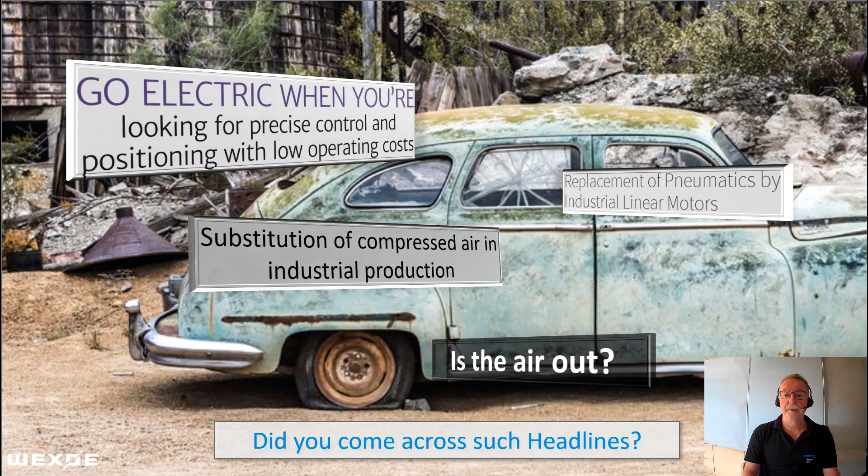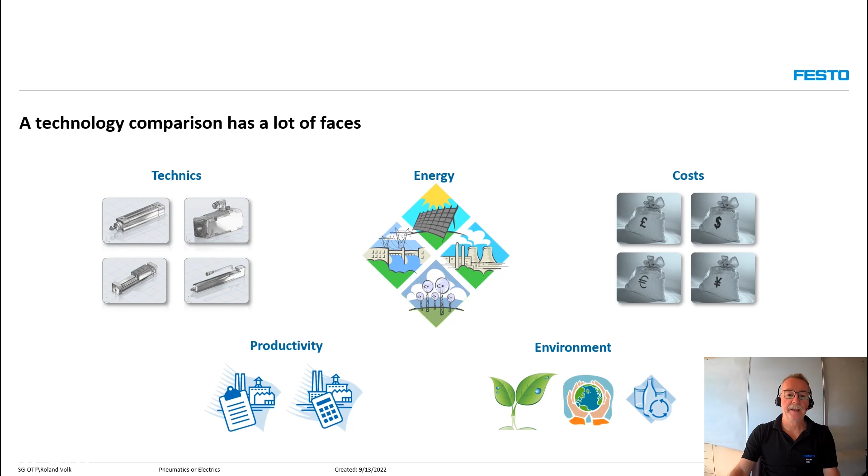Headlines like this, I think you all have seen in the daily newspapers. But what is the truth? Is it really true that the air is out? And if you want to have more efficient systems, you have to replace pneumatics by industrial linear motors? We will see. A technology comparison has a lot of faces. But mostly, if you see in the daily newspapers, the focus is on the energy consumption. Only a few take a look at the costs, especially the investment costs, and also the techniques, the productivity and the environment.

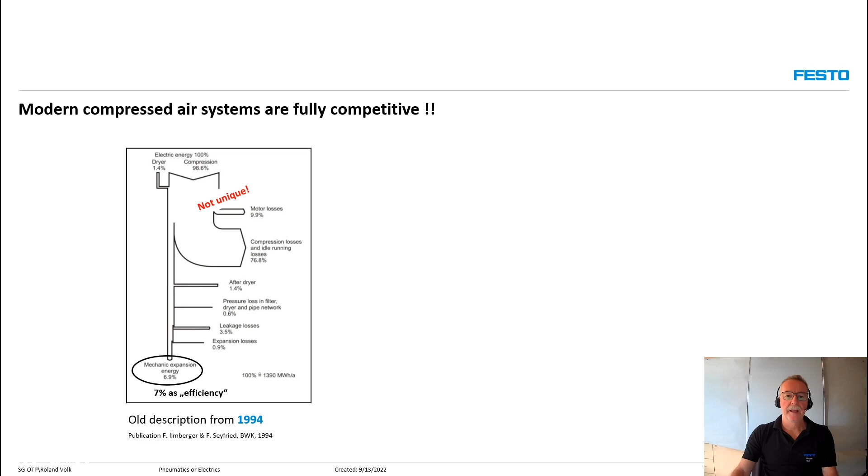First of all, I will give you some information about compressor systems, because this is the energy for pneumatics, so we have to take care of the generation of compressed air. And I think a lot of you have this energy diagram on the left side here in mind. This means 100% of electrical energy you put in a compressor, and at the end, we have 7% left directly on the machine. This was valid for a long time. This was created in 1994, but it's a wrong argument here. And we know since around 10 years that a compressor is much more efficient than we see on this diagram.

Here, a modern system with a 64 kilowatt compressor, 100% in. We have our losses in the compression, in the preparation, and so on. But at the end, we have around 42% remaining on the machine. This is partly theoretical. In most cases, the degree of efficiency of a compressed air system is around 20 to 25%.

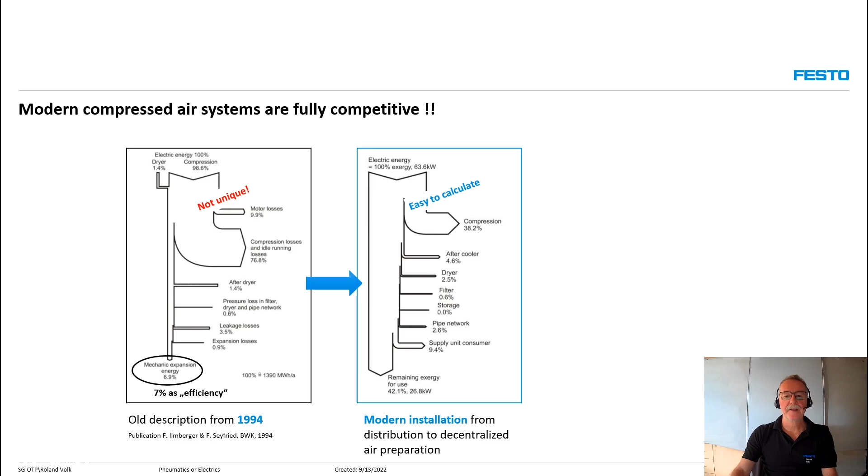I have a lot of discussions with our customers about the technologies, and they ask me mostly, what is the better way? What is the most efficient way? So my answer is the application is the key, and we tried to figure out some key questions to choose which is the best technology for the application. And you see here these 5 questions.

So, do we need a free and flexible position? Are there long strokes with high speed and short cycle times required on the machine? Do we need more than 3 positions in our application? Or does the drive have more tasks than clamping or holding? And last but not least, is a smooth motion required on the system?

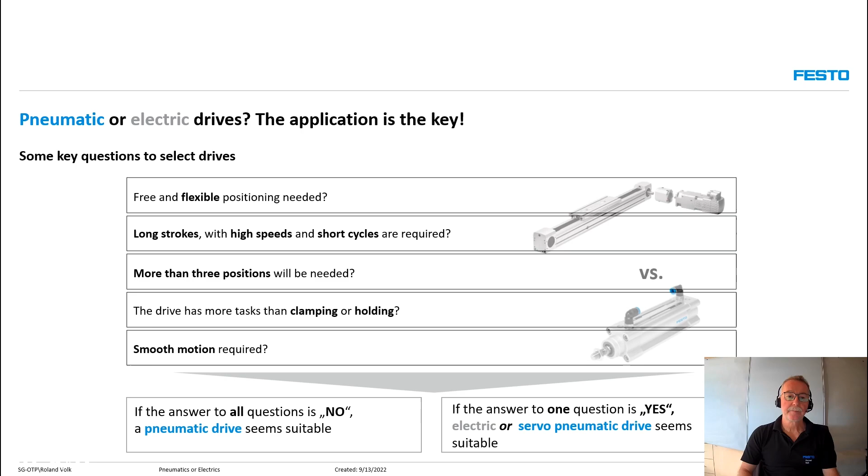If we can answer all questions with no, a pneumatic drive seems to be the best solution. If one answers yes, we have to think about an electrical or servo-pneumatic drive system here, because both technologies have their strengths and also their weaknesses. I will start on the electrical side.

The strengths of the electrical system: we have a flexible operational profile. We can easily adjust the drive system. We have really high stiffness, high dynamic movements, much higher than pneumatic systems. And in our case, we have a load-dependent use of energy. So it depends how much weight is on the drive. This is the result then for the energy consumption.

A pneumatic system always takes the same energy. If you run the cylinder with a high load or with no load, every time the same volume for the drive has to be filled. The strengths of the pneumatic system: it's easy and cost efficient.

We have low maintenance, normally a high degree of protection, especially in Ex areas where we have to spend a lot of money for electrical systems. There's no problem with the pneumatic system. Then an absolute advantage, we have high power density, so a small required space. We have a lot of force in a small space in the machine, easy installation and setup, and 100% overload possibility.

The weaknesses on the electrical side: the system design is really complex. We have a limited overload capability. We have a high required space, a high investment. We're talking at the moment about a ratio between 1:4 up to 1:8 between a pneumatic system and an electrical system in the same application. And don't forget, we have decentralized heat generation on the electrical system. So each motor, each controller is generating heat directly on the machine.

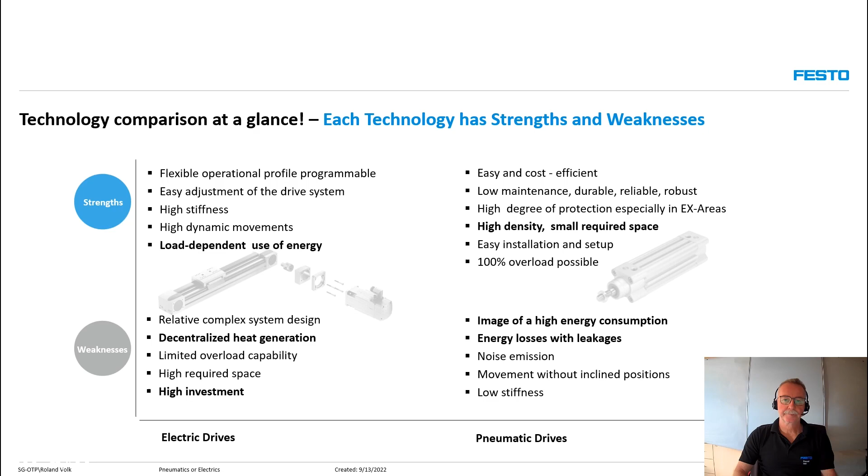Yeah, and if we take a look at a drive system, electric or pneumatic, the best case is to have a holistic evaluation of the life cycle costs. So it means TCO, total cost of ownership, or LCC, life cycle costs. And this includes the acquisition costs, the energy costs, the cost for the installation, the cost for the commissioning, the implementation efforts, so the time, the know-how you and your colleagues need, the maintenance, and so on.

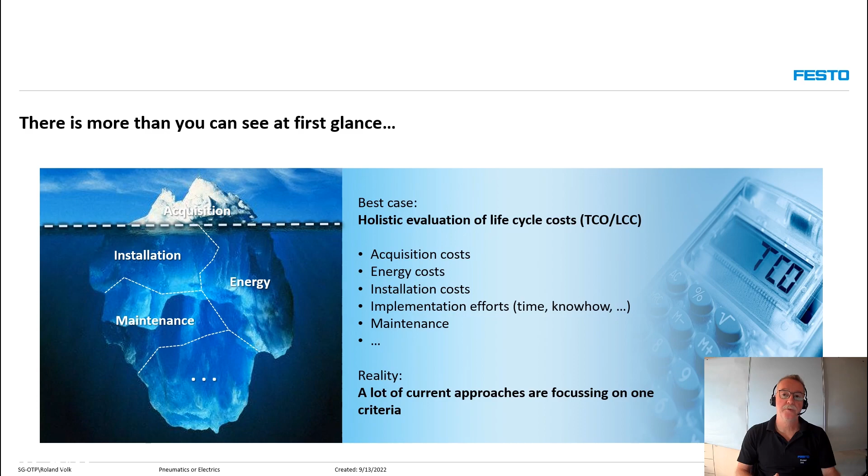But the reality is, a lot of the current approaches are focusing only on one criterion, as I mentioned before, mostly the energy consumption.

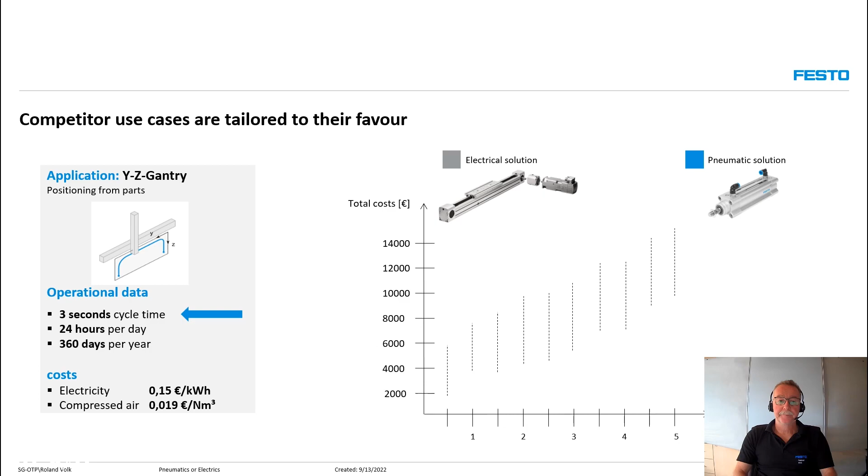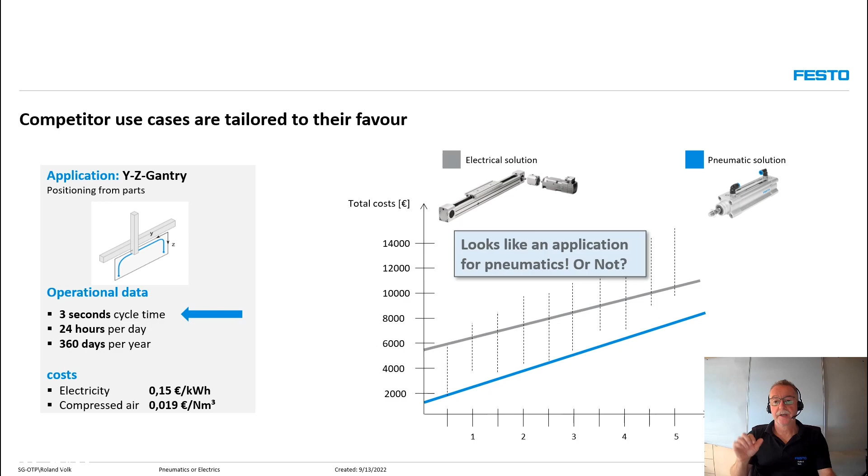But if we change the cycle time from 1.5 to 3 seconds, also 3 shifts per day and 360 days a year, then what happened? We have completely different curves. The pneumatic system is much cheaper in invest and also for the energy costs. And so I think there is no discussion. You change only one point in the application and get a completely different result.

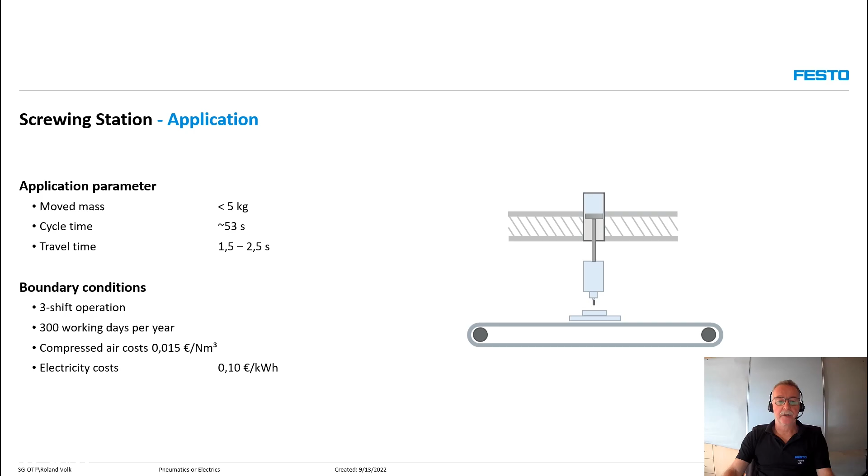Yeah, some more applications now from the automotive industry. A screwing station, we have to move 5 kilograms here on front. The cycle time is around about 53 seconds, and the travel time for the cylinder is between 1.5 and 2.5 seconds. We have a 3-shift operation, 300 days a year, and the compressed air cost is only 1.5 euro cents because the customer has his own power plant. So the electricity is really cheap. You see only 10 euro cents per kilowatt hour.

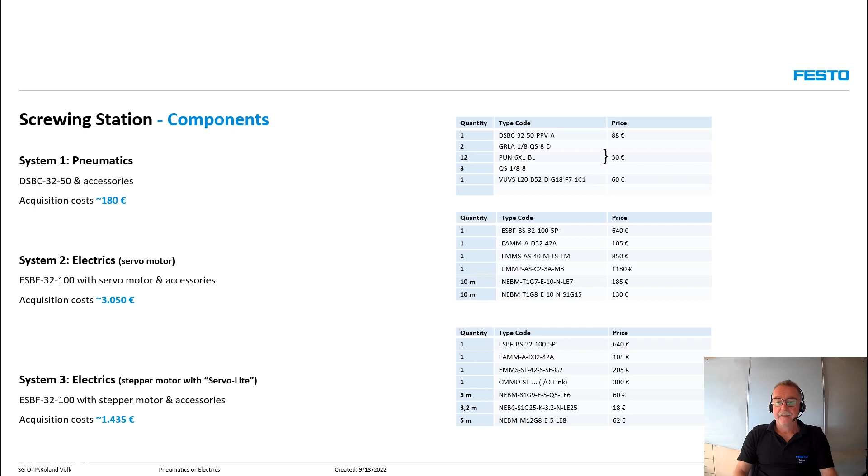And the cost evaluation: the invest for pneumatics 180 euros. The energy cost is around about 10 euros. The electrical system, 3,000 euros. The energy costs are double the energy costs for pneumatics. I will describe why. And the stepper system, the energy costs are around about 1/3 of the pneumatic system. Especially on the servo, we have a really long cycle time, but the movement is only 1.5 to 2.5 seconds. So this means 50 seconds we are in standby with the electrical system.

An electrical system in standby has an energy consumption. The controller needs energy, the power supply needs energy, and it's much more than a pneumatic valve, which is in standby and activated. In a standard motor controller, we're talking about 15 to 20 watts consumption, and a pneumatic valve, it's between 0.3 and 0.5. And this is why the energy consumption of the servo system is much higher than pneumatics. And if we see the diagram here, I think you agree with me, these lines will never meet in the next 20 or 25 years.

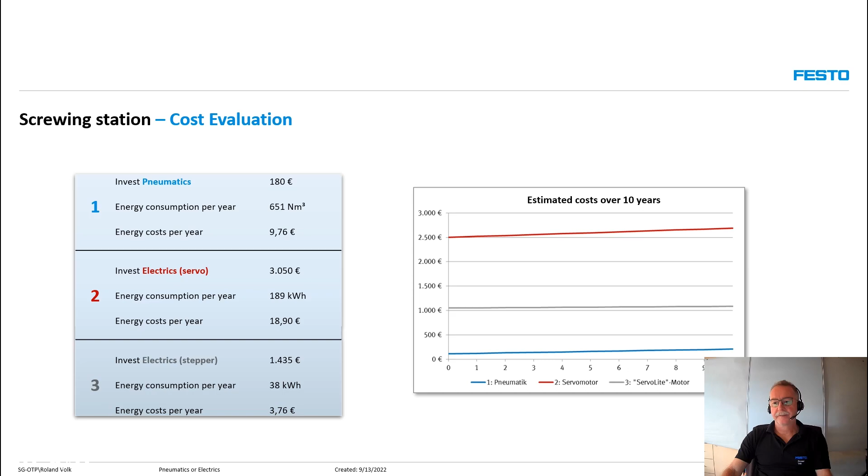Another application, it's a transfer system. You can see it here. We're picking parts from this side, 1.8 meters vertical and then 4 meters horizontal and down 1.8 meters to another conveyor belt. 1.5 kilos, the cycle time is 23 seconds and the travel times horizontal 5.5 and the vertical 2.5 seconds.

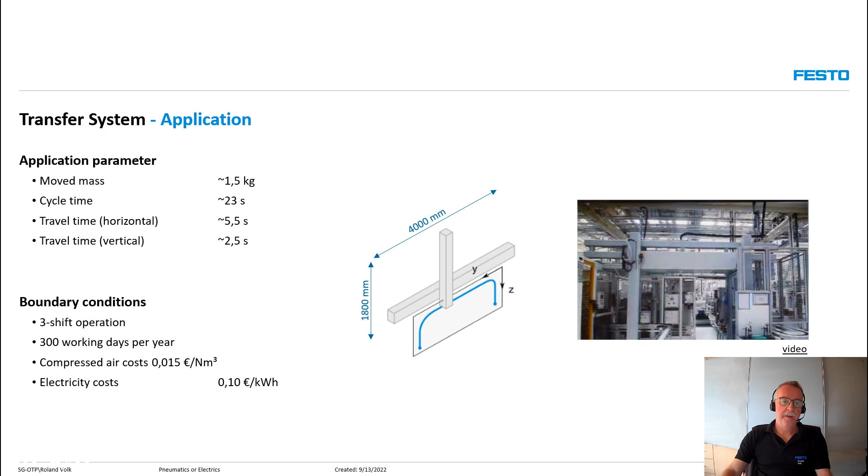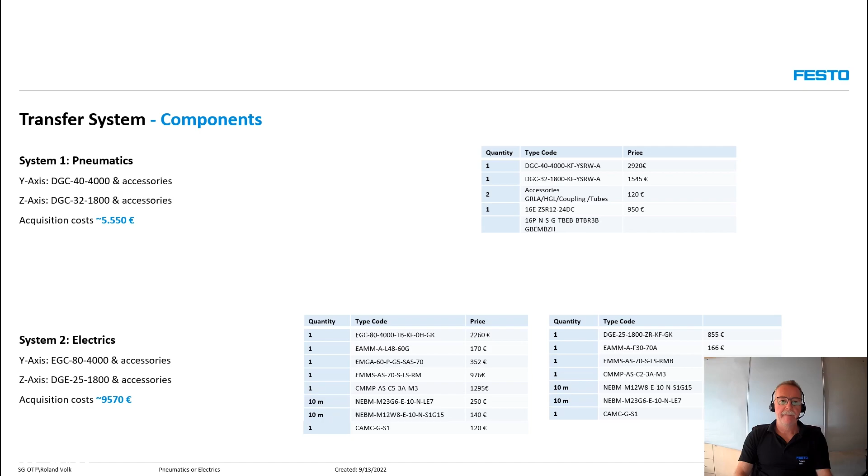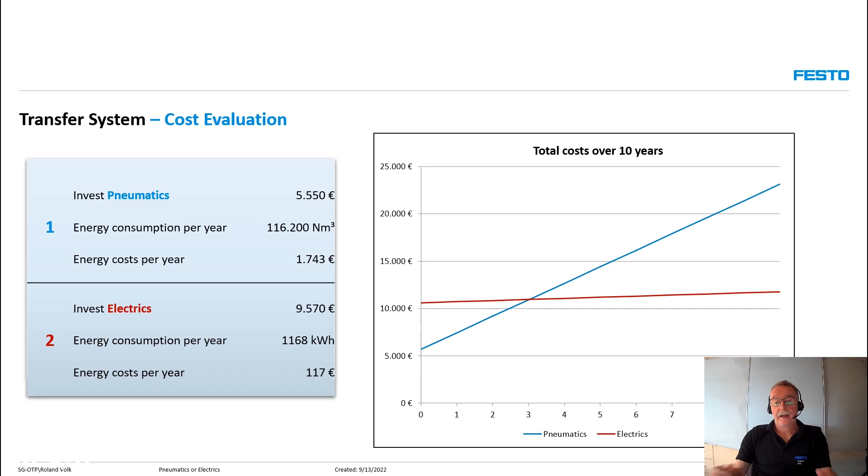Same boundary conditions, and the calculation here, you can see the pneumatic system is 5,500 euros and the electrical system is 9,500 euros, only investment. And here we have the cost for energy. We have now 1,700 euros for the pneumatic system and only 117 euros for the electrical system. So after 3 years, the electrical system is paid. And I think here it's clear. I will choose the electrical system here.

Yeah, and at the end, I will show you a live demonstration, pneumatic versus electric. We have here a demonstrator, the electrical drive. It's a 100 millimeter electrical drive with a tooth belt. And on the right side, it's a pneumatic drive, also with 100 millimeters. They have nearly the same force. And we run these two drives in 3 different movements.

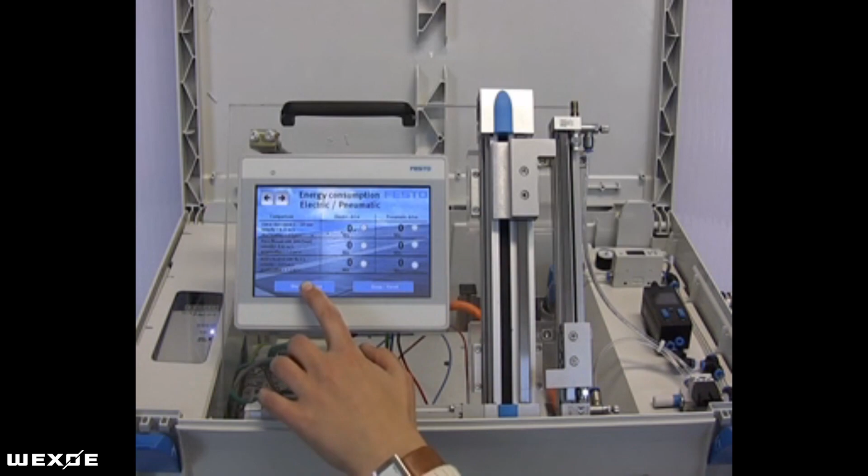First of all, a movement without any load, 3 times. Then pneumatic system, 3 times. We'll zoom in so that you can see the values later. Now we are running with a load of around about 10 Newton. And at the end, we have here holding a mass with around about 55 Newton. So the pneumatic system is pressing against the electrical system. Now we are changing. The electrical system is pressing against the pneumatic system.

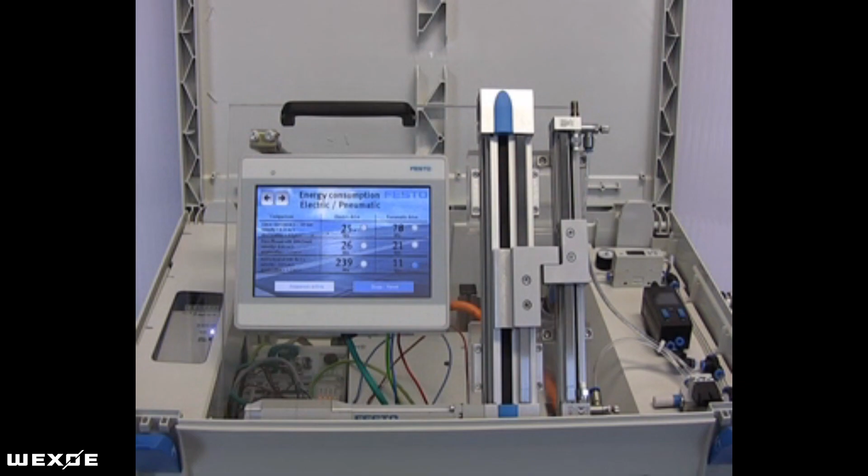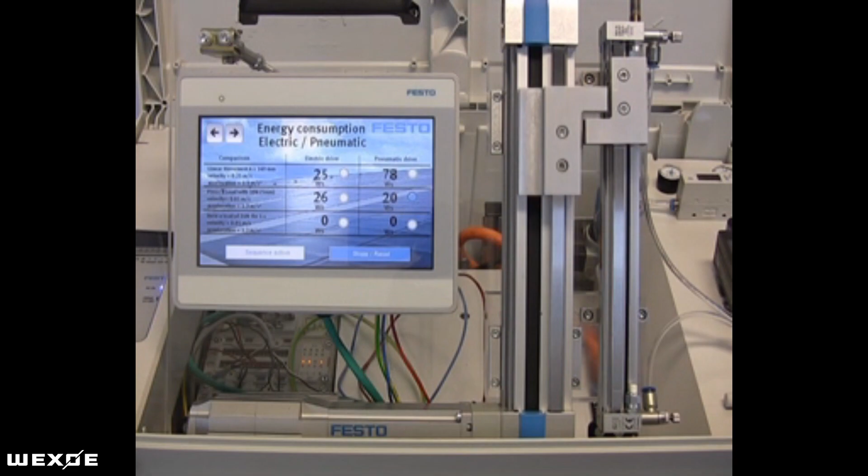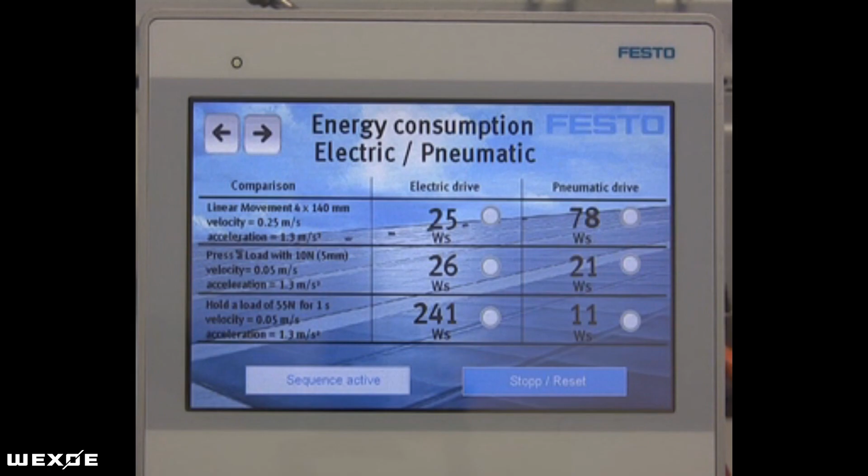And if we take a look now at the values, the linear movement without any load, electrical system, it's 25 watt seconds. Pneumatic system, it's 78, 3 times more. With a load of 10 Newton, 26 to 21, and now, the pneumatic system is pressing the electrical system and it's increasing the energy consumption to 240, and on the other side, the pneumatic system has the force inside when it's activated.

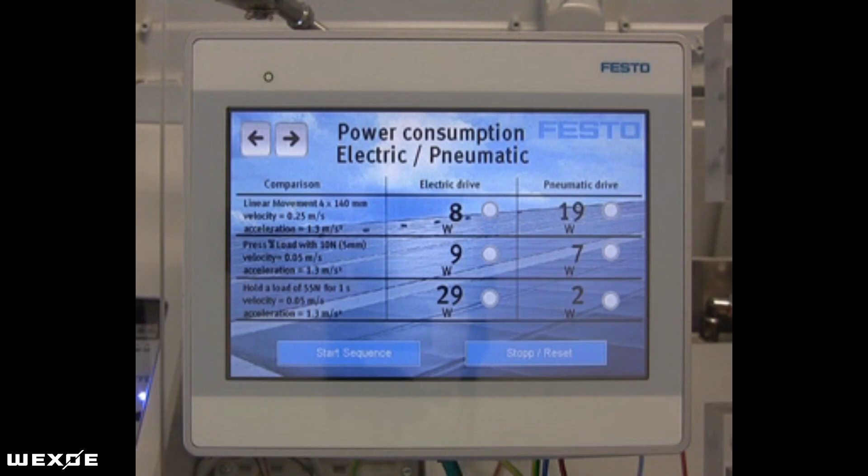Holding, pressing, clamping, these are the advantages for pneumatics, and movements with long strokes and short cycle times and lower force, this is the advantage of the electric system. A short overview of pneumatic versus electric.